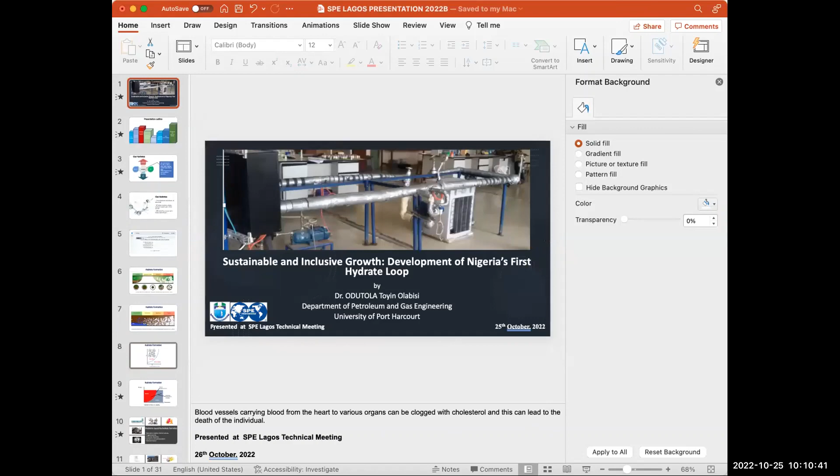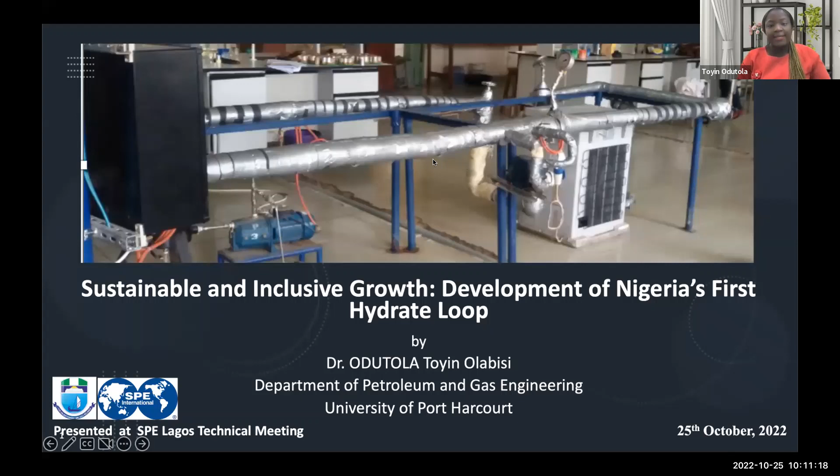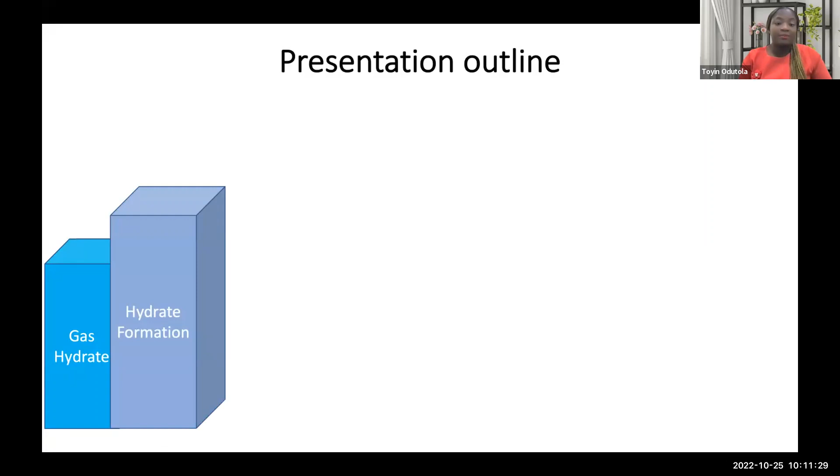So I'm Toyin Odutola, and I'll be talking about how I developed the first hydrate flow loop and how the hydrate loop has contributed to sustainable and inclusive growth. Okay, I'm going to turn on my camera. Okay, so here's the outline of the presentation. I'll talk to you about what gas hydrates are during the introduction, and then I'll be telling you about the different ways hydrate forms. So we'll be discussing hydrate formation, and we'll look at the problems caused by hydrates, why we have to think of ways of taking off hydrates from our lines.

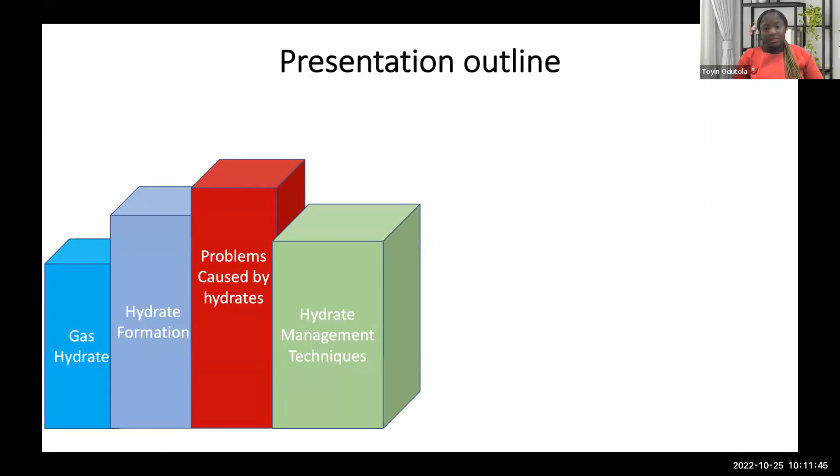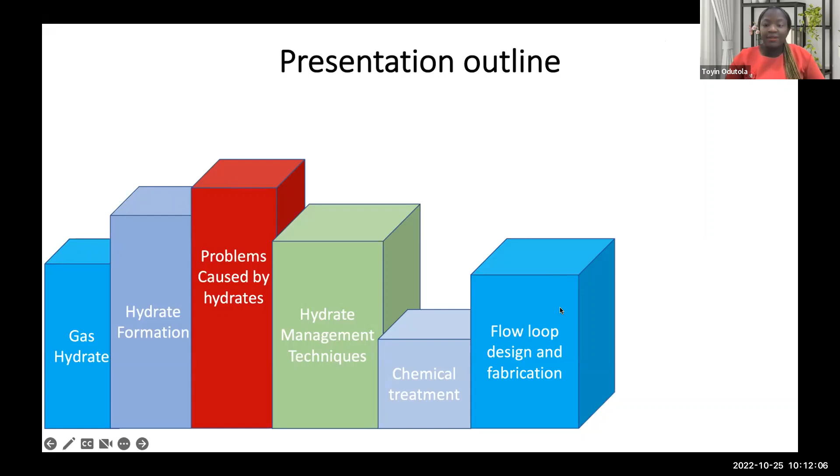Then we'll discuss different hydrate management techniques. And then I'll be discussing chemical treatment with you because this is what I used. The loop I developed was for testing different chemicals for treating hydrates, for testing chemical inhibitors. So we will talk about the flow loop design and fabrication, how it was done. And eventually I'll be talking to you about the loop performance, where I'll share with you some of the results that we've obtained from this loop. And I'll conclude with some of the contributions this research has made in terms of sustainable and inclusive growth.

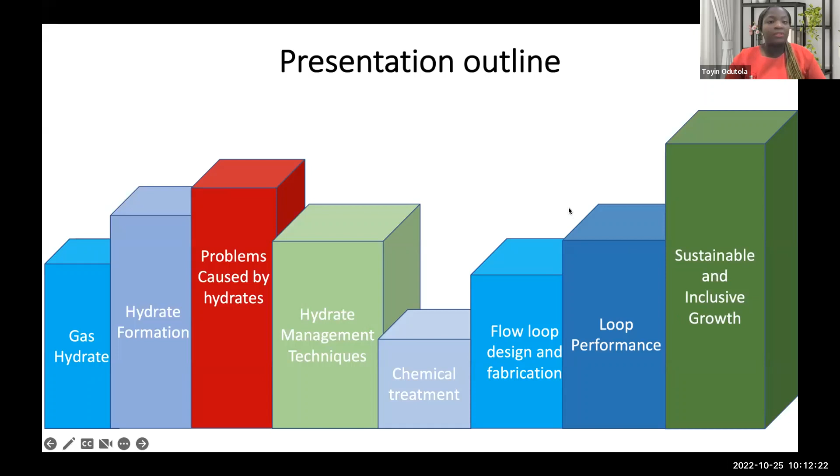So gas hydrates are non-stoichiometric crystalline compounds. What that means is that they do not have a particular stoichiometric equation. They contain about 85% of water, and they are a major flow assurance problem in offshore operations. Offshore operations, because that's where we usually have very low temperature, which is a requirement for hydrate formation, and high pressure because of the long lines that we have to pass our fluid through.

And I should also mention here that this presentation will be interactive, so I'll be asking you to give me some feedback, to respond to some polls, which I'll be posting very soon. So back to what hydrates are.

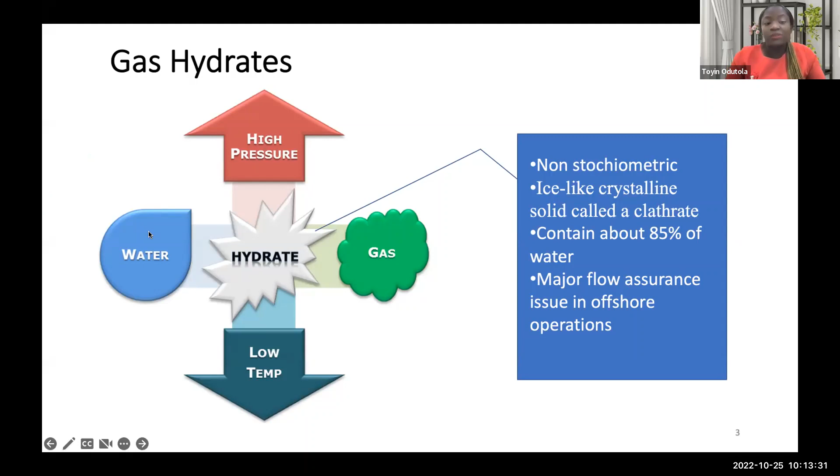So hydrates form at high pressure, and we usually find high pressure environment and low temperature. So our offshore environments usually have very low temperature and high pressure because we have very long lines. So we have to pass the fluid at high pressure so that it gets to the end of the line. Now, for hydrates to form, we need to have water and gas.

And there are different types of hydrates, different structures of hydrates that are known. And these include the structure 1, structure 2, and structure H. But for us in the petroleum and gas industry, the structures that we are interested in are the structure 1 and structure 2 hydrates, because our fluid only forms structure 1 and structure 2 hydrates.

So the structure 1 hydrates are usually formed by methane, ethane, hydrogen sulfide, carbon dioxide, which we usually find in our fluid, while the structure 2 hydrates are formed by isobutane and nitrogen.

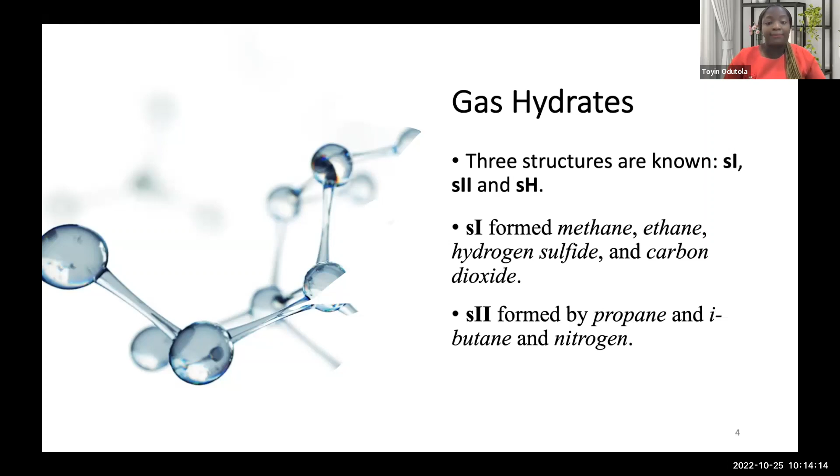Now, to the first question, I would like you to respond to this because we call it gas hydrates. Does it mean it only forms in gas-dominated lines, or we can have hydrates forming in oil lines, or we won't have hydrates forming in oil lines? So I would like you to respond to this poll before we move further.

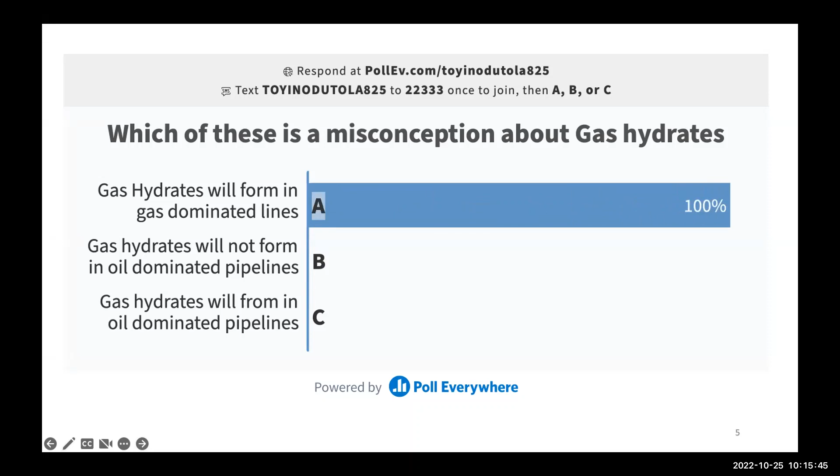I think I shared the link with Anastasia. So if you want to post on the chat. Please, can you hear me? Yes, can hear you though. Okay, so I'm hoping that you can respond to this as well. Anastasia, please, can you post the link on the chat? I'm sharing, so that may be hard for me. Yeah, I'm doing that. Thank you. Okay, got it. Is it good to do that too? Okay. We've gotten some responses. So it's the misconception about gas hydrates. Okay.

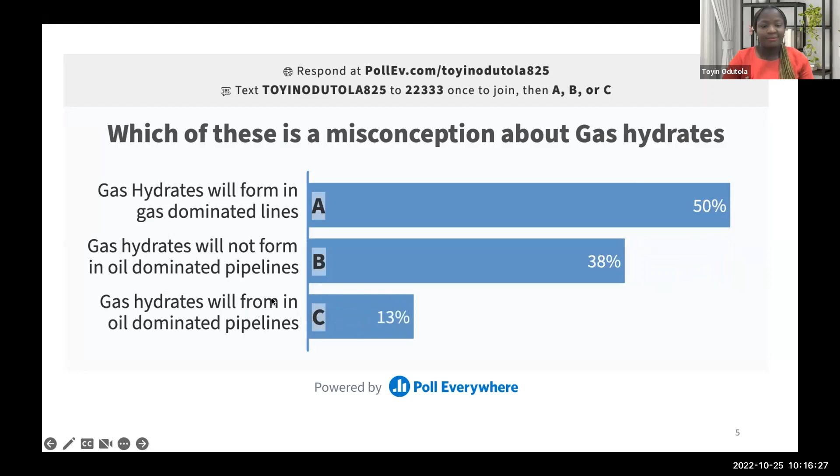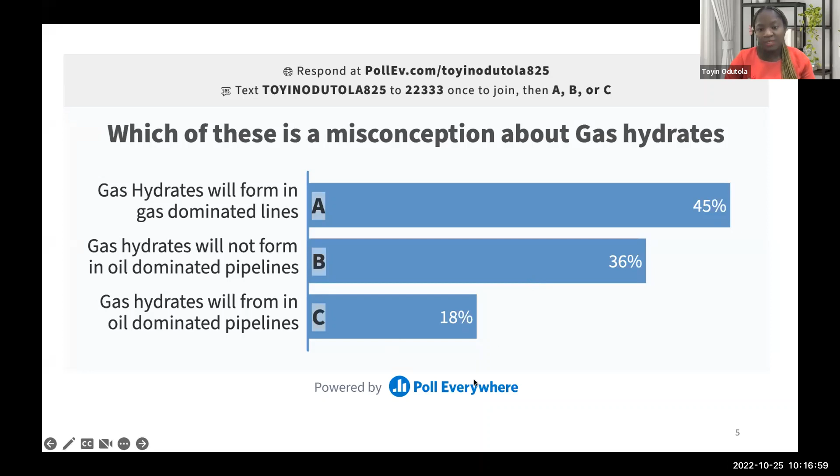Okay, so thank you very much for participating in the poll. I see that a lot of us feel the misconception is that gas hydrates will form in gas-dominated lines. I don't think that's a misconception. Gas hydrates will actually form in gas-dominated lines. Gas hydrates will not form in oil-dominated lines, that's a misconception, because gas hydrates will form in oil-dominated lines, and that is also correct. So thank you for participating. I'm glad that it's getting interactive.

So I'm going to show you how hydrates can form in different systems. So this is a research done by Sloan in Colorado School of Mines. And what they have here is a gas-dominated line. And it's important for us to understand the mechanism for hydrate formation so that when we start thinking of managing it, it's easier for us to manage it. So for gas-dominated lines, hydrate usually forms around the walls of the pipe, and you have something like an annular growth going on here.

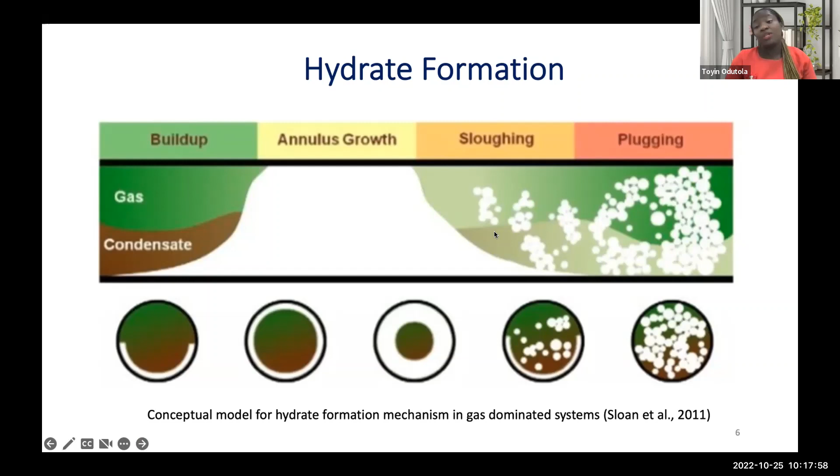Eventually, the weight of the hydrate causes the hydrate to crumble. When the hydrate builds around the walls of the pipe, it gets so heavy and it crumbles, and then that is when you can start having a hydrate plug forming. So this is the conceptual model for hydrate formation in gas-dominated lines. So you can still have some oil in these kind of lines, but you have more of gas.

Now, for oil-dominated lines, you have oil and you have some water and you have gas. So you have the hydrate forming around the molecule of water, like we can see over here. And the hydrate keeps growing, increasing in size, and eventually it starts agglomerating, attaching itself to each other, and then you eventually have a plug. So understanding this helps us to know how we can manage hydrate formation.

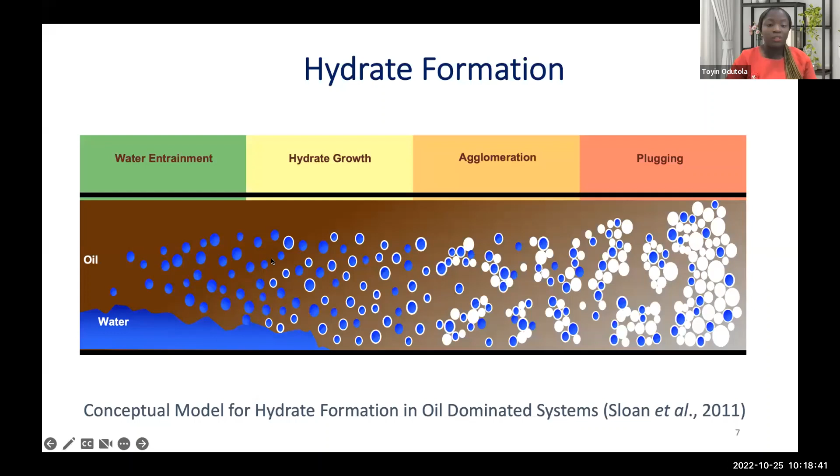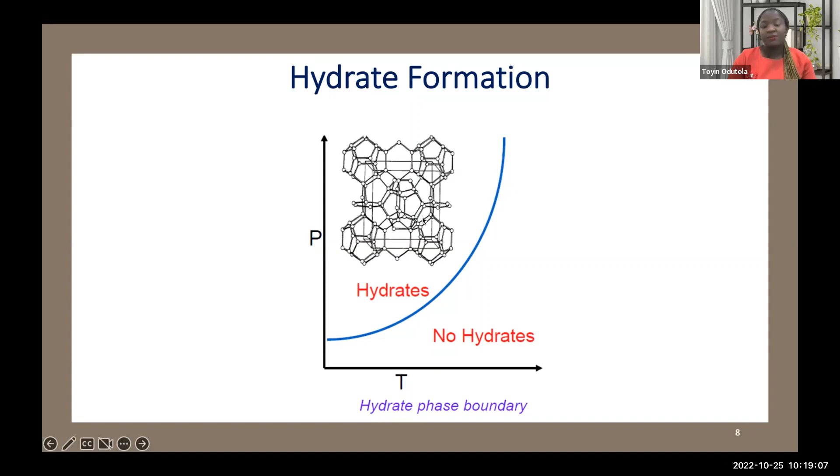Now, for most of our fluids, what we want to do is to understand where hydrates will form and where hydrates will not form. So we usually try to get the hydrate formation curve, which can be gotten with a couple of correlations, or we use a software. So if your operation is occurring at the right-hand side of the curve, you will not bother about hydrate formation. Whereas if your operation is on the left-hand side of the curve, that's the hydrate risk zone. So you should be thinking of hydrate mitigation measures.

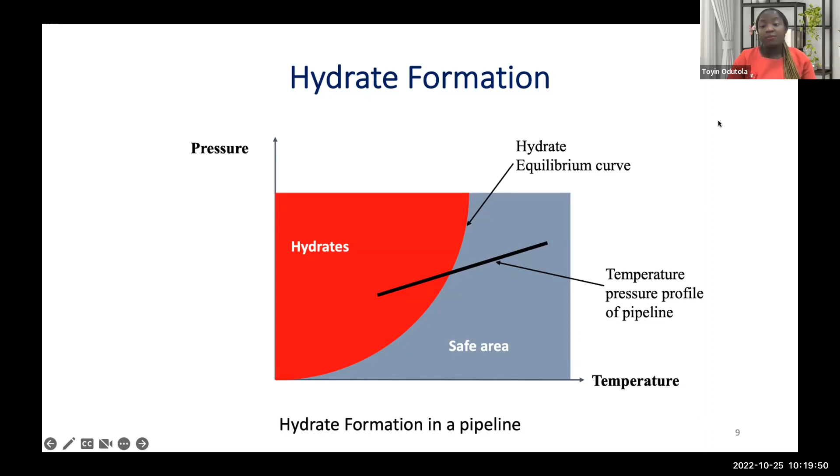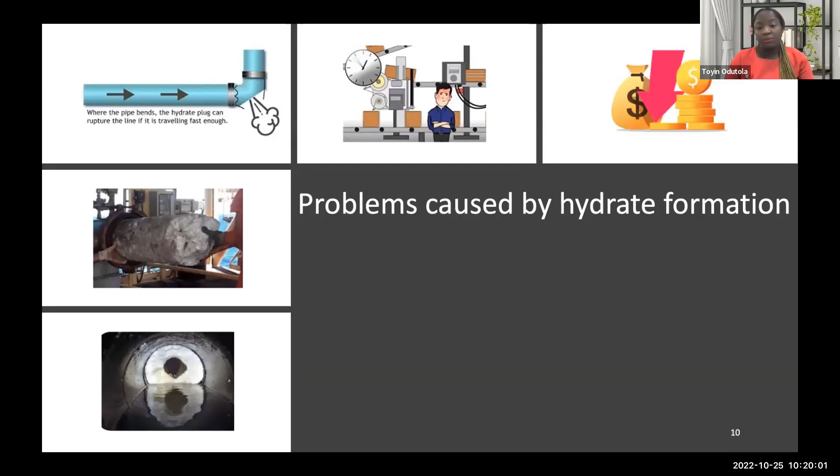But when you start moving into the hydrate risk zone, you might have to start thinking of ways to prevent hydrate formation or to manage hydrate formation from the methods we'll be looking at very shortly. Now, why do we even need to bother about hydrates? Because it causes a lot of problems. So here are some of the problems that hydrates cause.

It causes the reduction in the internal diameter of the pipeline. So your pipeline was formerly maybe 8 inches, but with the hydrate forming around the walls of the pipe and building up, it keeps reducing, like we can see in this little picture over here. Eventually your pipeline internal diameter could reduce to 6, and if not managed, it keeps reducing. And eventually, if you do not manage it properly, you can have a plug, like the plug we have over here.

And when you eventually start having hydrate plugs, dissociating is another big problem, because hydrate is like pressurized gas. You have gas stored up in water. So when you do not depressurize properly, it can cause the pipe to rupture. There have been situations where depressurization was taking place, but it wasn't properly managed, and the hydrates moved like a projectile and broke the pipe open and spilled the fluid out.

Another reason why hydrate mitigation is important is because if it's not managed, there's production downtime. If you're having a problem, that's production that you cannot produce. So you have to start looking for ways to remediate the hydrates before you start producing. I've already talked about operational and safety problems like what we have here. And loss of revenue is also one of the reasons why we should prevent hydrate formation, because when we start having hydrate formation, we may start losing money if we do not treat quickly.

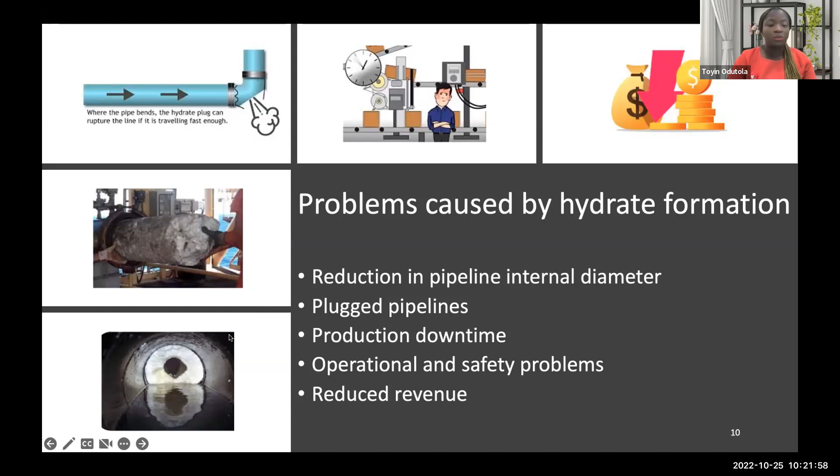So here are some of the methods that can be used in managing hydrates. There's the chemical control, which involves using a lot of chemicals like the THIs, the thermodynamic hydrate inhibitors, or the low dosage hydrate inhibitors, which I'll be talking about shortly. Then there's also the removal of gas hydrate formers, where you take the hydrate former away from the fluid. In that case, you would want to take off the gas or try to dehydrate to remove the water. So when you do not have gas and water together in the fluid, the possibility of forming hydrates is reduced.

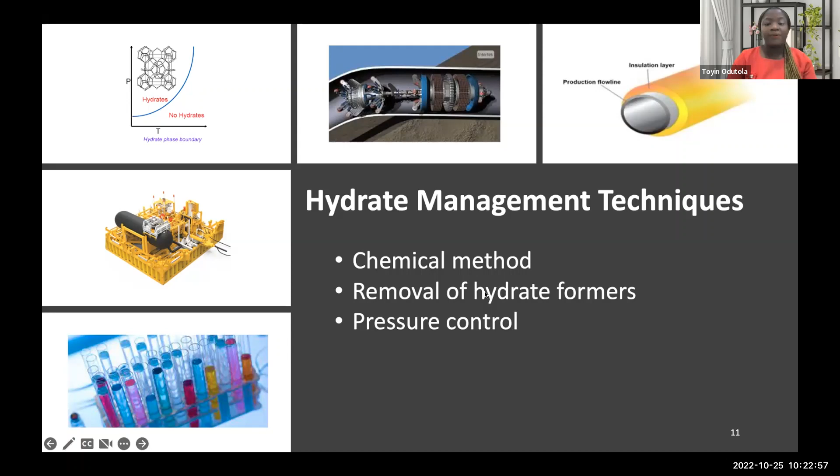Pressure control. We know that hydrate forms at elevated pressure, but that's subject to the temperature at which the operation is occurring. So if you try to reduce the pressure below the hydrate formation pressure, then you would likely not have hydrates forming anymore. And the mechanical method, which involves using pigs to clean the pipe periodically. If you know you're having hydrates forming around the walls of the pipe, you might want to pig the line periodically to clean the line and take off the hydrates.

And then there's also thermal insulation, where you try to insulate the pipe, or you use heat treatment. You can treat the pipe using different methods of heating the pipe. So these are some of the methods that have been used to control hydrates.

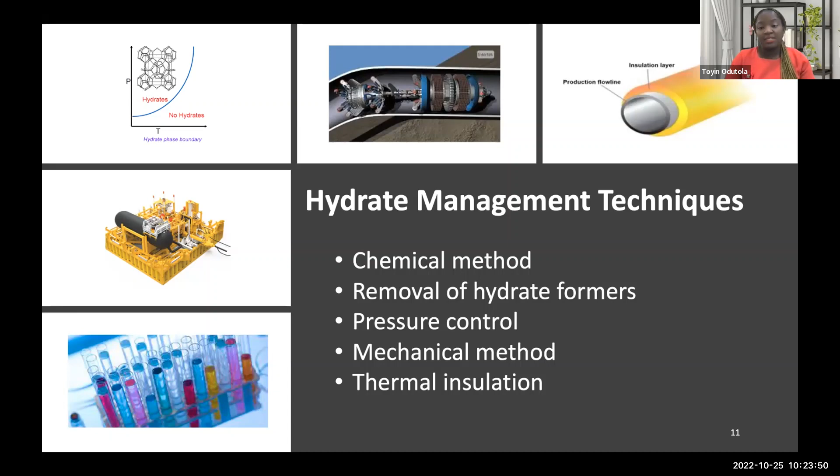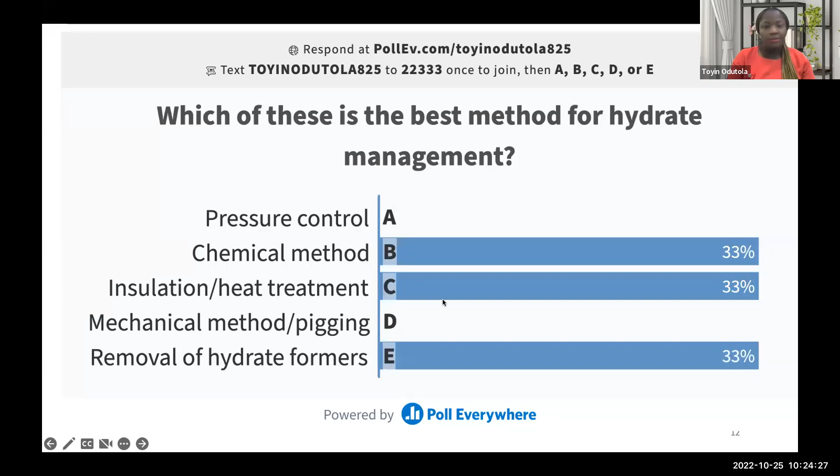So in my second poll, I'm asking, which of these do you think is the best method for managing hydrates? I think it's the same link. So please confirm that you can see this question. You can respond to this question when you click the link. Okay. Okay, thank you for your response.

I see a lot of people saying chemical method is the best, and some are saying the removal of hydrate formers is the best. So, well, there's 33% of us saying that removal of hydrate formers is the best, and 33% saying chemical method is the best. So I don't think there's any best method for hydrate management. It depends on the facility you're dealing with.

If you know you can actually control the pressure, you may want to try that out. But it also depends on the cost. You might want to see if this is expensive, or whether you can actually afford to do this. Because for chemical method, you have to keep injecting the chemicals every day to prevent the hydrate formation. So you want to check if that is something you want to do.

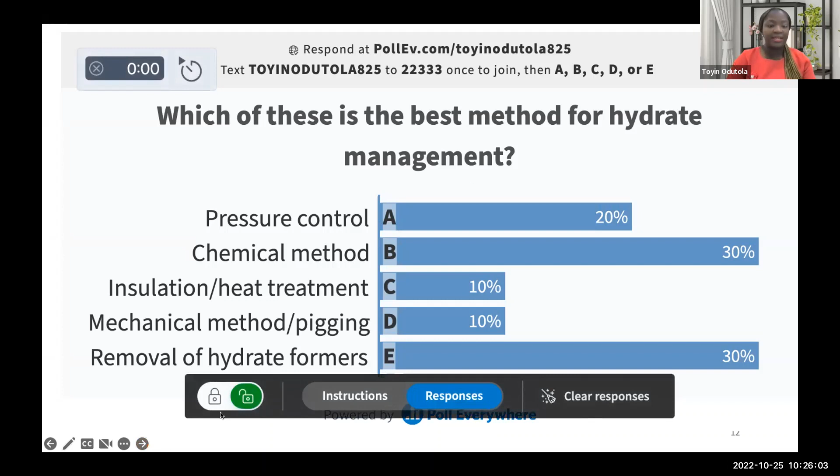So eventually, the best method is a combination of them. You may want to try combining one or two methods to see how it performs and how it prevents hydrates from forming, depending on what your production facility is like. So we'll move on to our next slide.

Okay, so for me, when I was working on the hydrate loop, what I had in mind was chemical treatment, which is actually very popular. That's what people do, it's kind of easier. All you do is inject the chemical into the line, and then it either melts the hydrate or prevents the hydrate from agglomerating or prevents the growth of the hydrates.

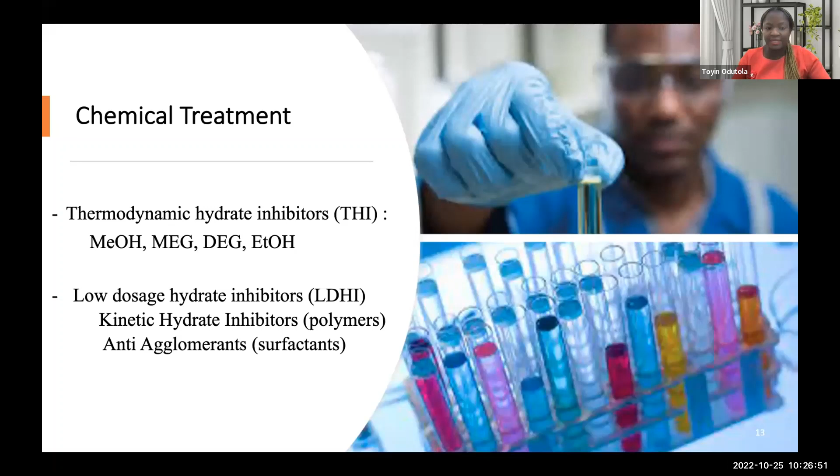So there are different types of chemicals that we use in treating hydrates. These include the thermodynamic hydrate inhibitors and the low dosage hydrate inhibitors, which there's a lot of research going on about. These are the kinetic hydrate inhibitors, which are usually polymers, and then the anti-agglomerants, which are surfactants.

Okay, so for thermodynamic hydrate inhibitors, they are well used in the industry already. They are methanol, monoethylene glycol. Those are the chemicals that are used in melting hydrates or preventing hydrate formation.

That's for the thermodynamic hydrate inhibitors. But now they are required in very large quantity.

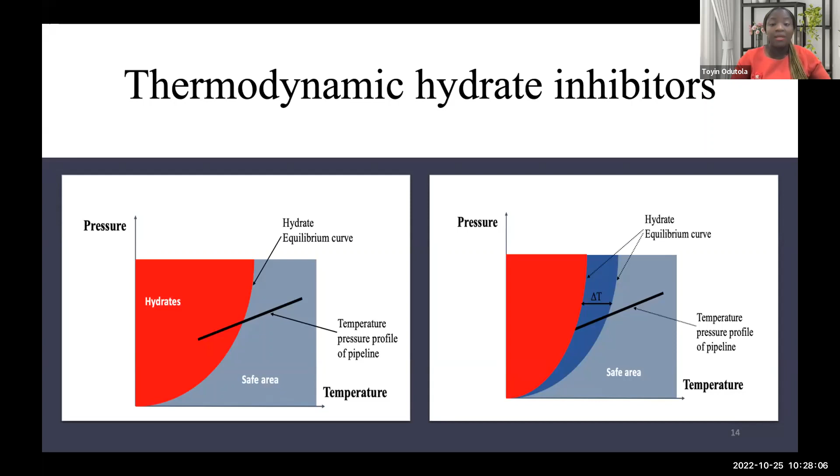So again, when you put these thermodynamic hydrate inhibitors, especially in your oil line, some of it is retained by the hydrocarbon phase, by the oil phase. So when you take your crude oil for refining in the refinery, you can still have some residual methanol, which can cause problems with the catalyst during refining.

So a lot of research has moved from thermodynamic hydrate inhibitors to low dosage hydrate inhibitors. And again, for thermodynamic hydrate inhibitors, because they are required in large quantity, you would also need very large storage vessels for them. So for low dosage hydrate inhibitors, there are basically two types.

There's the anti-agglomerants, which prevents the agglomerating. Remember, we looked at the mechanism of hydrate formation, and we said for oil pipelines, what happens is that the hydrate forms, then it agglomerates. So the anti-agglomerants prevent the agglomeration of the hydrates, but it allows hydrate to form.

Then for the kinetic hydrate inhibitors, it prevents the growth of hydrate formation, so it kind of delays the growth. Eventually, there's an induction time, and it increases the induction time, so you do not have your hydrates growing to a particular size. It increases the time at which the hydrate starts crystallizing and then growing before plug formation occurs.

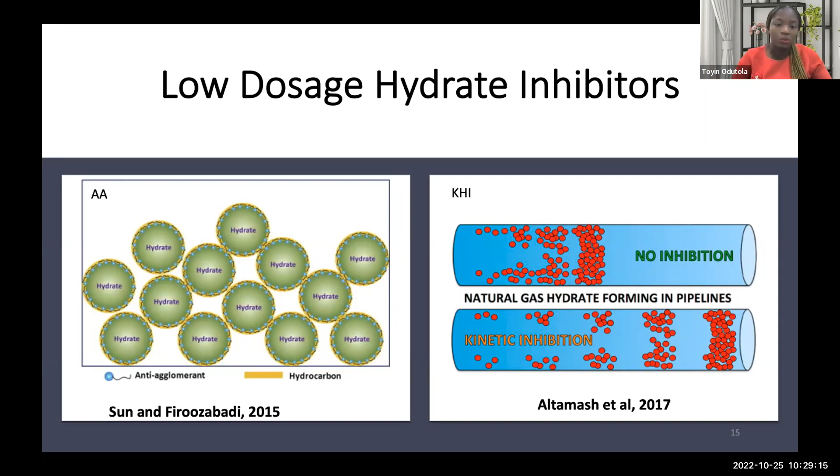So now back to why we are here, how the hydrate loop was designed and fabricated. I just wanted us to have a basic knowledge of what hydrate is and how hydrate is being controlled, so that when we look at the hydrate loop design, we would understand the different concepts that I had to think of and put into the design and fabrication.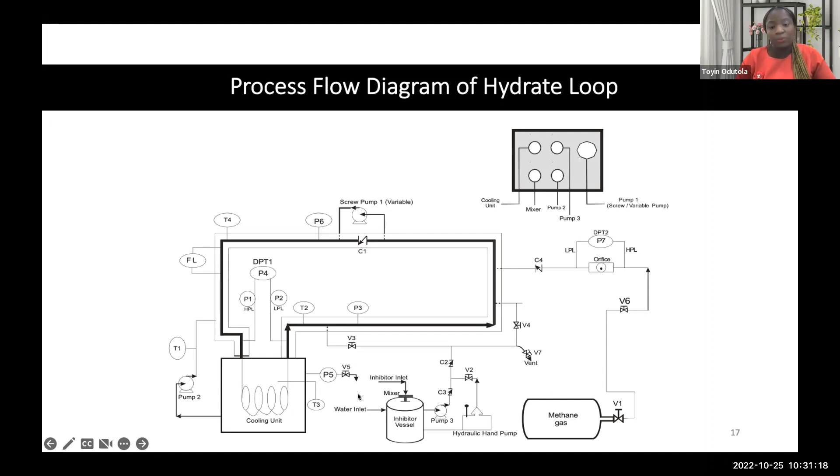So when hydrate starts forming, we usually notice that the temperature of the loop suddenly increases. And then we also have our differential pressure meters, which we were using to check the differential pressure between the inlet and outlet of the coldest part of the loop. So this is how I'll just take you through some pictures of how the loop was while it was being fabricated and how it looks now.

So here we had the loop, it was already skid mounted. Our stainless steel pipe is inside this PVC pipe here, and we have some temperature gauges there.

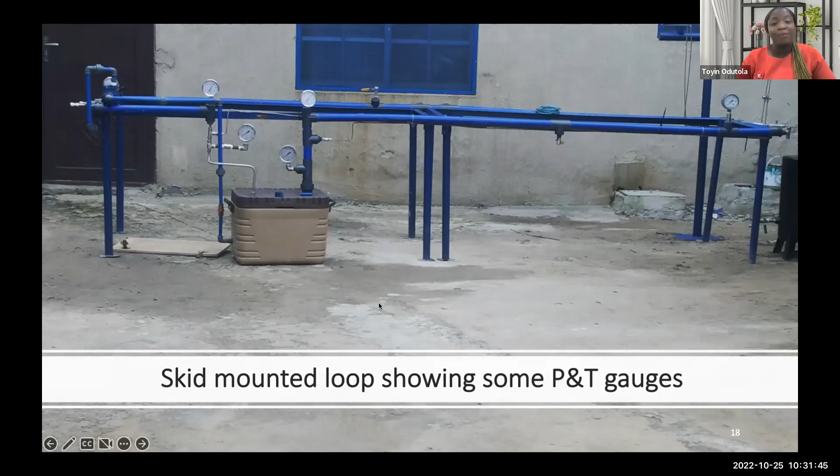So initially we thought we could use this cooler as our cooling unit, but it wasn't working. We were not achieving the temperature we desired.

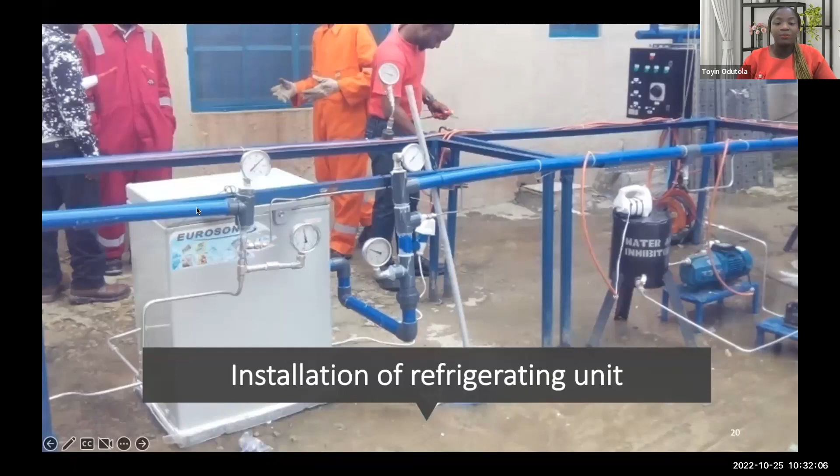And over here, we had removed our cooler and we brought in a refrigerating unit. And here, all those were happening in the fabrication, the place where it was fabricated.

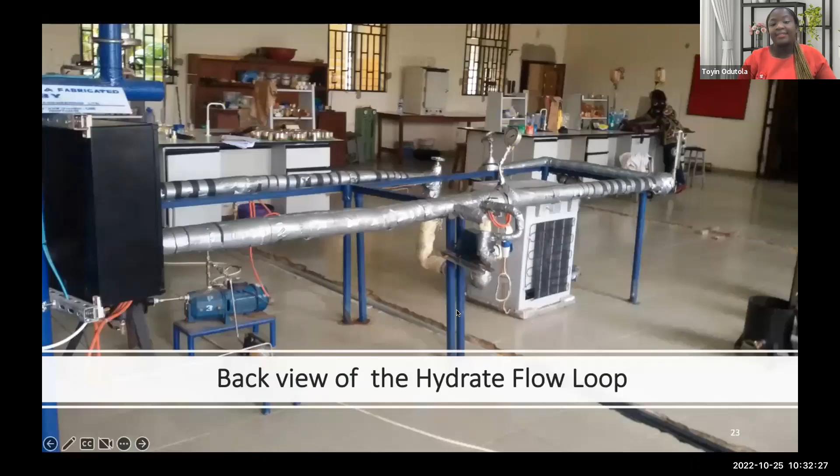Over here, we had brought it over to Uniport, and we had to still try to install it. And this is what it looks like right now. And this is the back view of the equipment.

So I have an animation here that shows how the loop operates. So I'm just going to play this video.

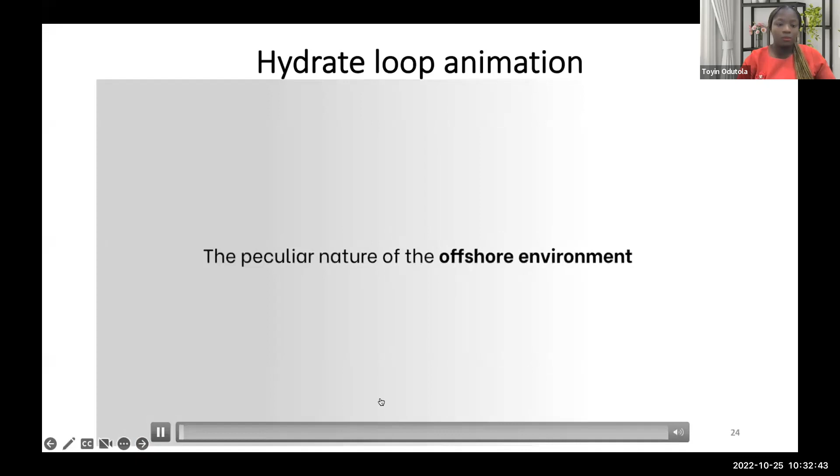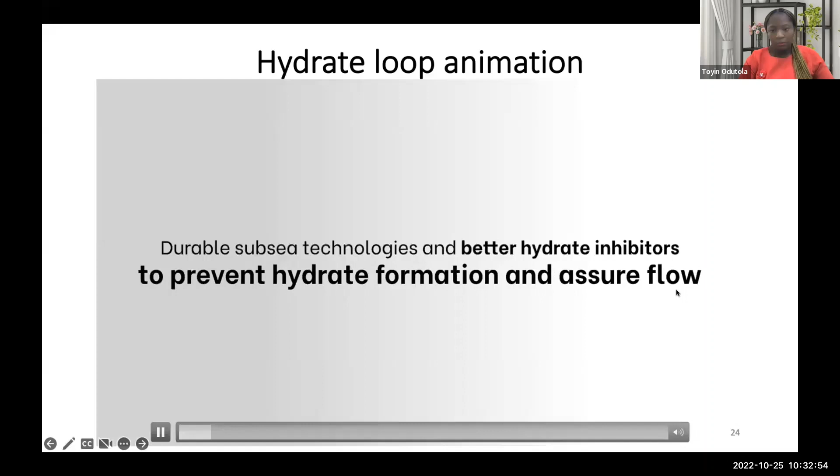The peculiar nature of the offshore environment has necessitated the need for the oil and gas industry to develop durable subsea technologies and better hydrate inhibitors to prevent hydrate formation and assure flow. With the introduction of the mini hydrate flow loop, these problems can be tackled by studying hydrate formation in gas-dominated systems using a constant volume batch experiment.

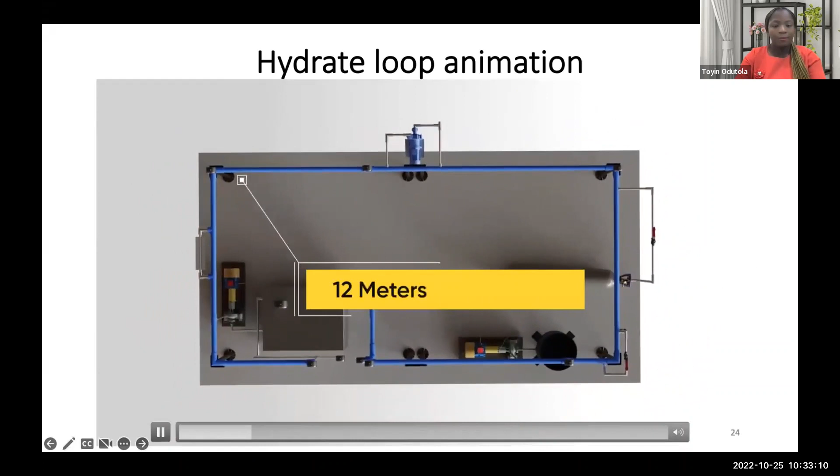The laboratory loop is a closed loop of 12 meters, fabricated using 0.5-inch 316 stainless steel pipe enclosed in an insulated 4-inch polyvinyl chloride (PVC) pipe. The hydrate loop mimics offshore production in the subsea environment. The steel pipe enclosed in the PVC pipe containing cold water represents the flow line on the seabed, surrounded by cold water.

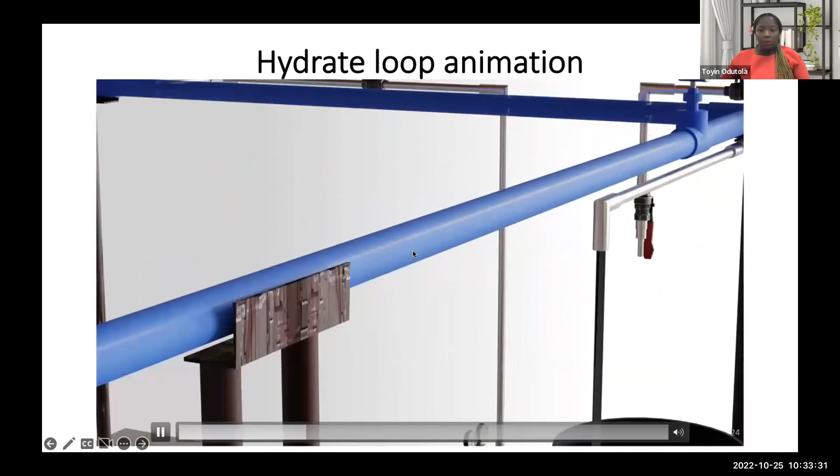The skid-mounted loop was fitted with pumps, temperature gauges, pressure gauges, differential pressure transmitters, a gas mixing vessel, an inhibitor mixing vessel, and a natural gas cylinder.

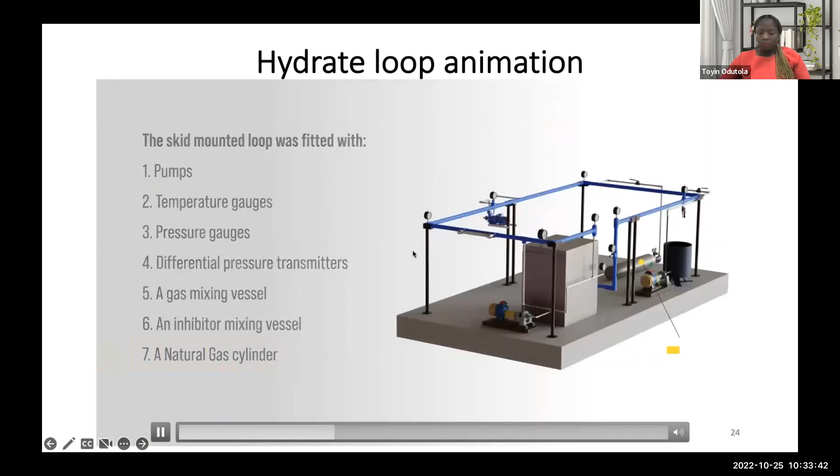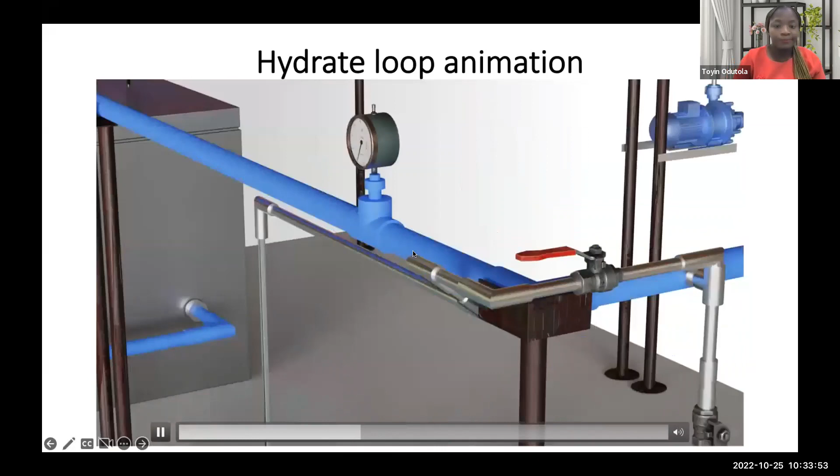The experiment starts by pumping 435 milliliters water into the steel pipe to raise the loop pressure to about 25 psi using pump 3. The cooling water generated from the refrigerator is then pumped around the annulus of the steel pipe and the PVC pipe using pump 2 to progressively reduce the loop temperature to hydrate formation temperature.

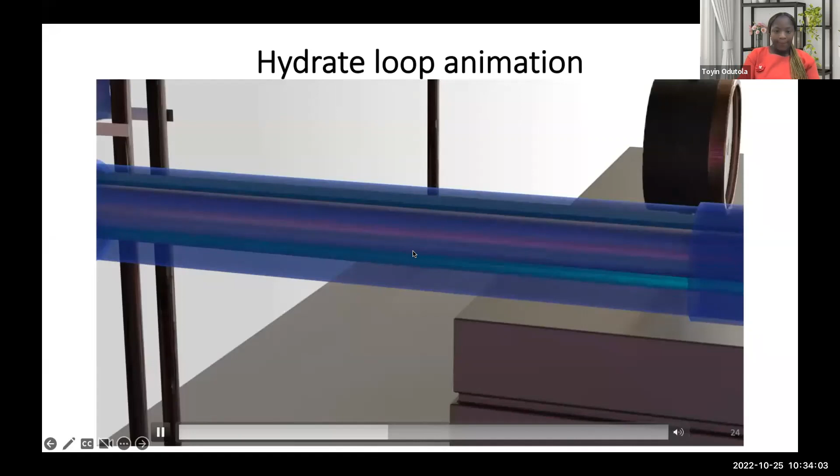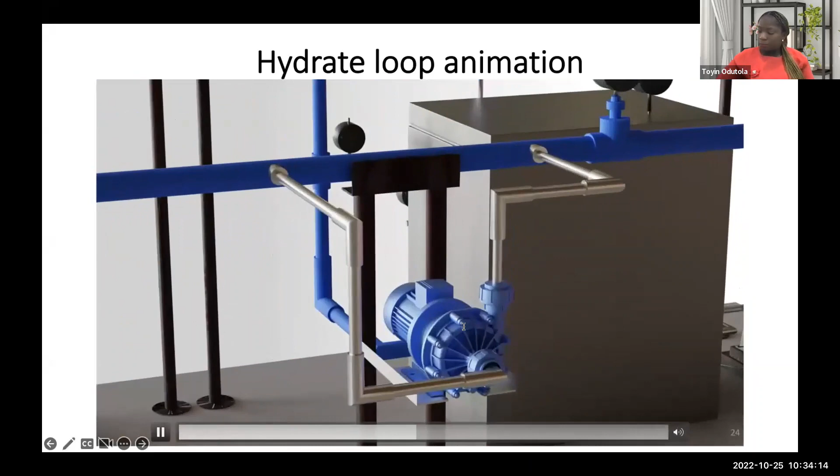Natural gas is injected into the loop to achieve a pressure of 150 psi as a single batch. The screw pump is turned on to cause agitation in the flow line. The temperature and pressure around the loop are recorded every minute during the 2 hours experiment.

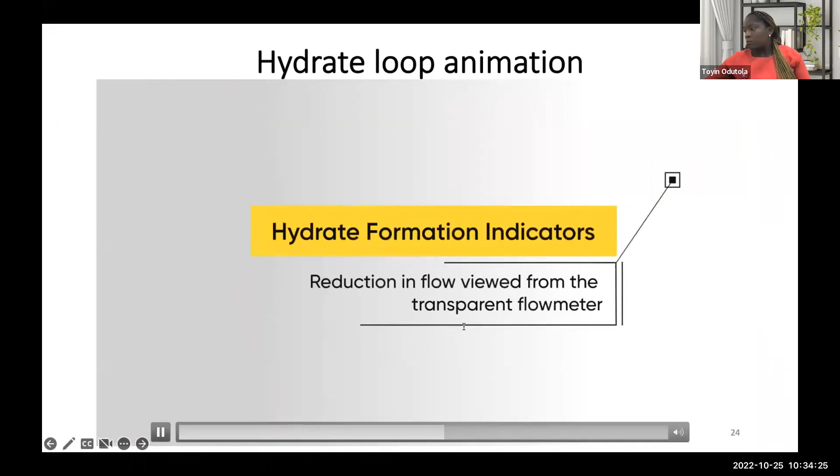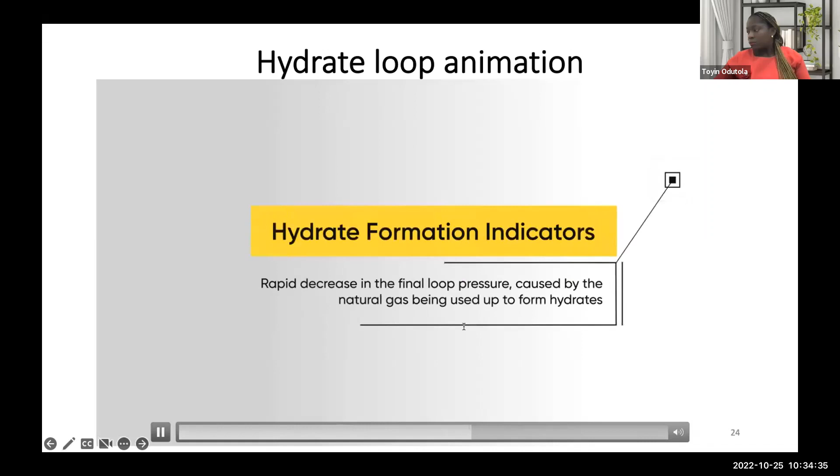Hydrate formation is indicated by: 1. Reduction in flow viewed from the transparent flowmeter. 2. Rapid rise in temperature caused by the exothermic reaction of hydrate formation. 3. Rapid decrease in the final loop pressure, caused by the natural gas being used up to form hydrates. 4. An increase in the differential pressure between the inlet and outlet of the refrigerating unit due to hydrate crystals forming around the inner pipe walls.

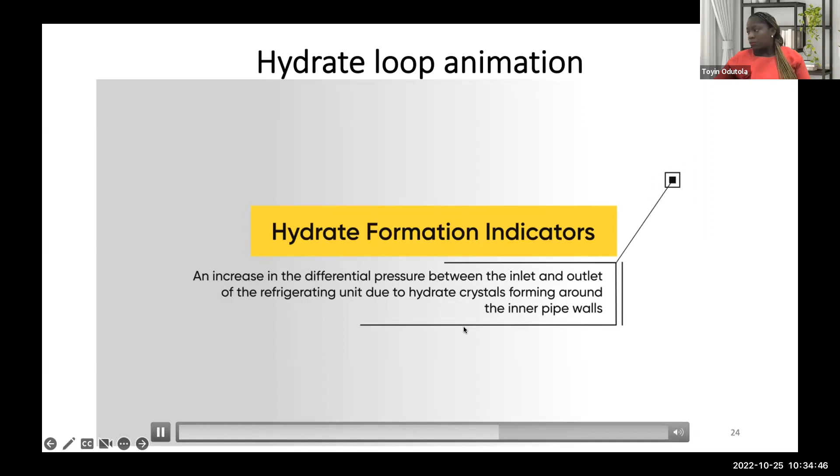When testing hydrate inhibitors, the inhibitor is mixed with water and pumped into the loop to make up the 435 milliliters. The gas is injected to increase the loop pressure to 150 psi, and the cooling water is circulated around the loop.

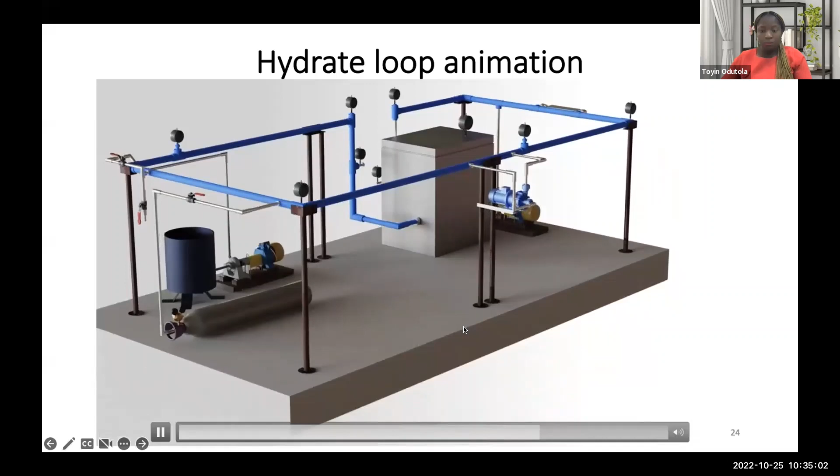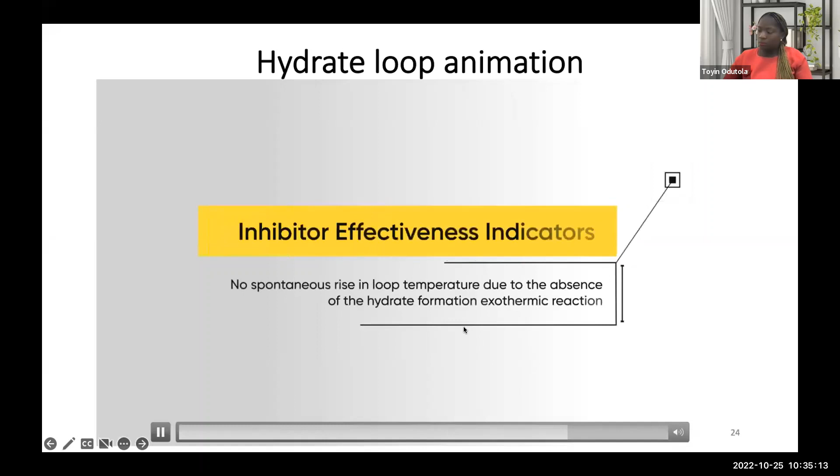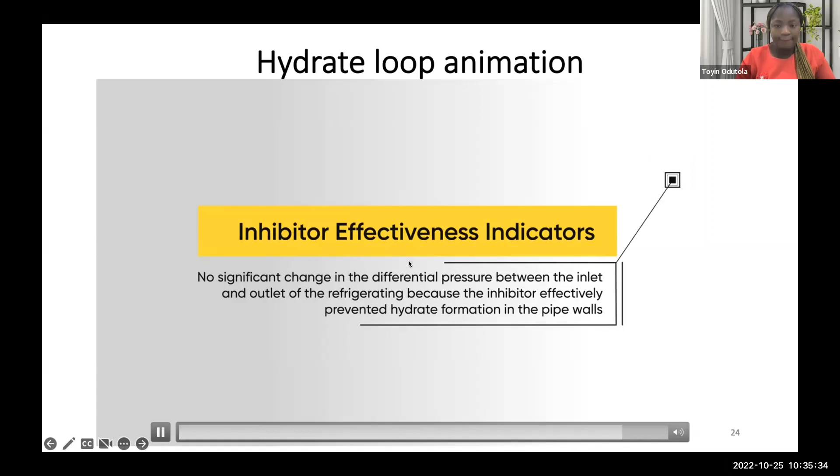Inhibitor effectiveness is indicated by: 1. No reduction in flow viewed from the glass flow meter. 2. No spontaneous rise in loop temperature due to the absence of the hydrate formation exothermic reaction. 3. No significant drop in the final loop pressure because the inhibitor prevented the hydrate formation reaction between the gas and water. 4. No significant change in the differential pressure between the inlet and outlet of the refrigerating unit because the inhibitor effectively prevented hydrate formation on the pipe walls.

The mini hydrate loop can adequately predict hydrate formation in gas pipelines and can be used in screening and selecting kinetic hydrate inhibitors.

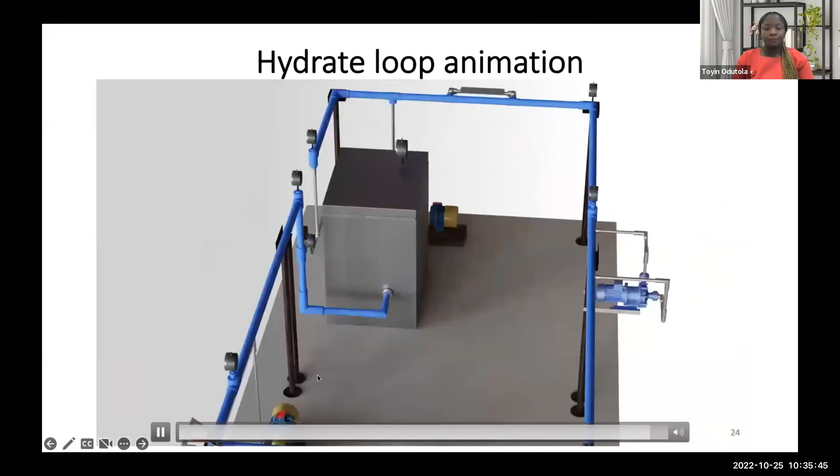Okay, so the animation just showed how the hydrate equipment works, how we got it to work, and I'll be sharing with you some of the interesting results that we've gotten from our experiments using the hydrate loop.

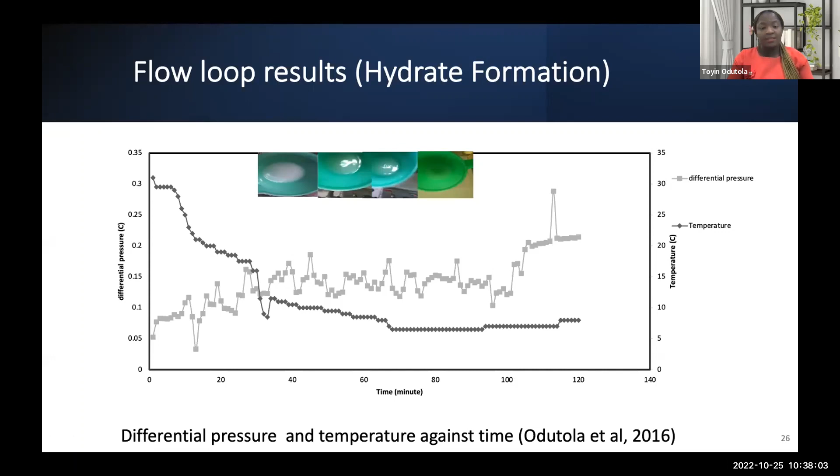We actually repeated this experiment with water alone and didn't have anything looking like this. So that showed that what was forming was actually hydrates.

Then we decided to try a couple of inhibitors. Some of the inhibitors I used are 2-dimethylamino ethyl methacrylate, polyvinyl pyrrolidone, and N-vinyl caprolactam. These inhibitors are all kinetic hydrate inhibitors. From what we looked at in the mechanism of hydrate formation, only kinetic hydrate inhibitors, or thermodynamic hydrate inhibitors, will work in gas-dominated systems.

What I've been working on so far has been a gas-dominated system, although the loop can also test for hydrates in oil-dominated systems. So we tried the inhibitors. At the beginning of the experiment the pressure was about 150 psi, but at the end of the experiment the pressure had reduced. When there was no inhibitor, it reduced to about 70 psi. That's because we were running a batch process where we load our reactants, shut in the line, and allow the reaction to occur for 2 hours.

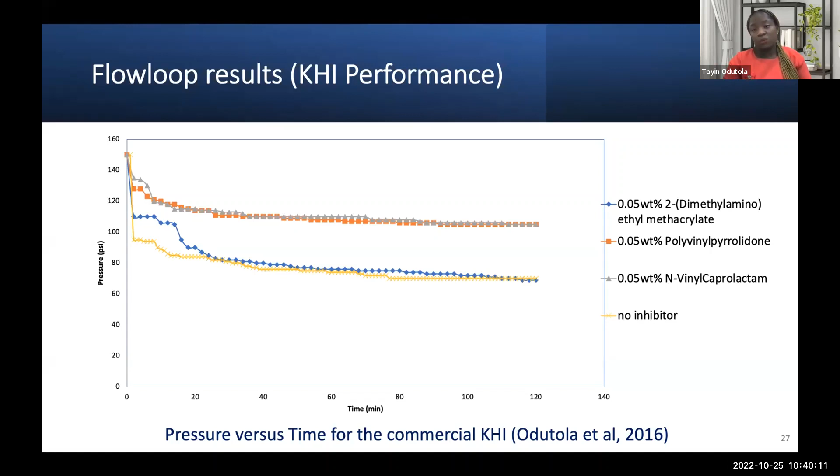So this made us understand that this particular inhibitor, 2-dimethylamino ethyl methacrylate, was not very efficient at mitigating hydrate formation in the loop. We also tried two other inhibitors, and with these the pressure reduction was from 150 psi to about 110 psi. So although there was hydrate formation, it was still able to stop or prevent rapid hydrate formation. Remember, when you're using a kinetic hydrate inhibitor, hydrate actually forms, but the growth is limited and reduced, so it doesn't grow as much as it would have without the hydrate inhibitor.

Now these are some of the things we have achieved from this particular research. I've been able to design and fabricate hydrate equipment, which in the past nobody thought could happen.

I had to start thinking of how to get it done, study, and change a lot of things, because I've been talking about batch experiments here. The equipment was initially designed to be a continuous flow experiment, but because of the electricity issues we have in Nigeria, it was very difficult to run it as a continuous flow process. So I had to think of other ways of making it work, and eventually the batch process started working.

The equipment has been used as a training facility in my university, and it has also served several other universities in the nation and in neighboring African countries. We've had about 4 PhDs now after my graduation who have used this equipment and also gotten their PhDs. Several MSc students from Uniport and other universities have come, including someone from UI, to use the equipment, and it's being used to demonstrate hydrate formation even to students. When I was in school I didn't get to see things like this, but most of the students I've had on it—when we started they were undergraduates, and some of them are even on their PhD now and still using the equipment.

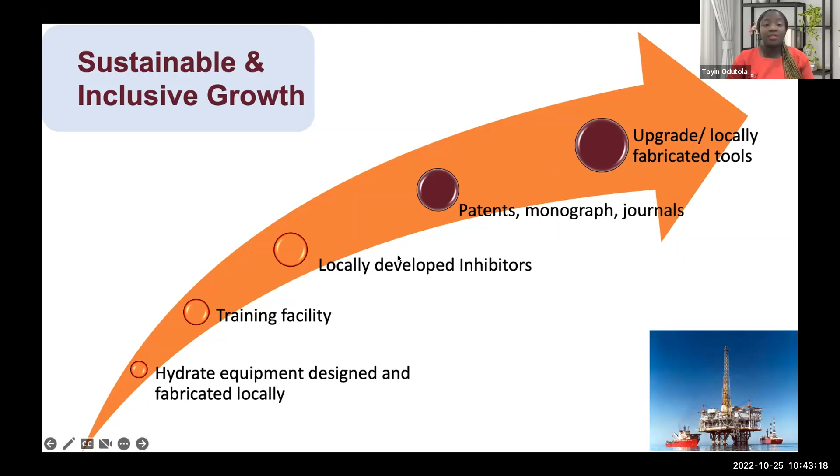And now there's the awareness that things like this can be done locally. And people are now thinking of ways of fabricating different tools. I'm working on something different now for wax inhibition. So different things are coming up. People are fabricating different experimental setups to test different things. So this has been a good addition to knowledge as well.

So from this research, because there will be better hydrate inhibitors being developed, and you can actually test your hydrate inhibitors, it's easier for you to have a proper line without any oil spillage due to pipe rupture.

Now, we've been talking about low carbon emission fuels of recent. People are looking at transiting from fossil fuel to low carbon emission fuels, and this research comes in handy because there are a lot of gas projects coming up, because people are looking at how they can transition to using gas instead of crude oil. So a lot of gas projects are coming up, and we want to keep our lines clean and open so that we are not having plugs that will prevent the gas from getting to the end user.